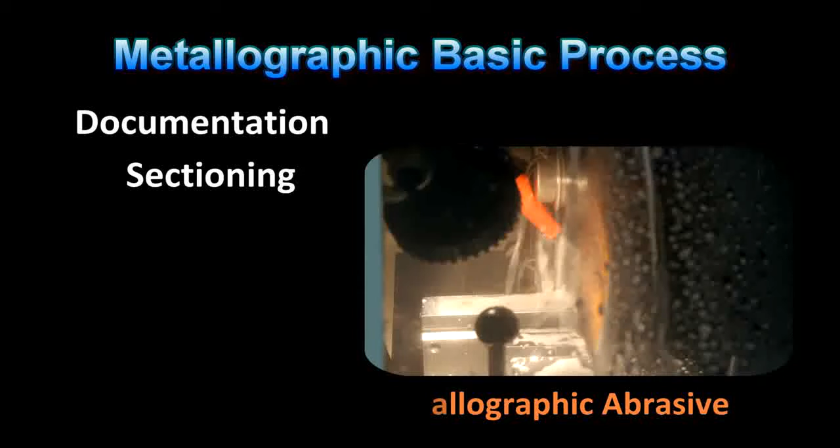Metallography can be broken down into 6 basic steps. The first step is to thoroughly document the sample. Since metallography is a destructive testing procedure, cataloging the initial condition and its history up front will save you a lot of anguish later. In many cases, the samples will need to be cut to either reduce their size or to approach the area of interest. Sectioning can be the most critical process, so proper cutting should minimize the amount of microstructural damage to the sample.

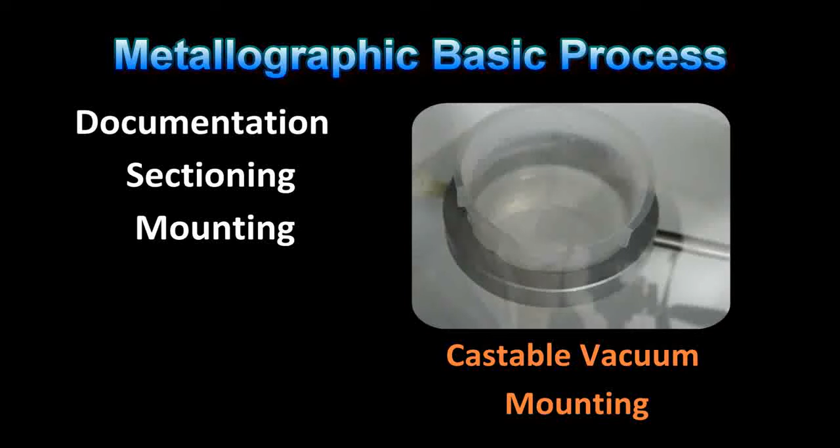After sectioning, it is recommended that the specimen be mounted in a plastic compound for ease of holding for manual grinding and polishing. Also, in most cases, mounted samples will be required for automated sample preparation machines.

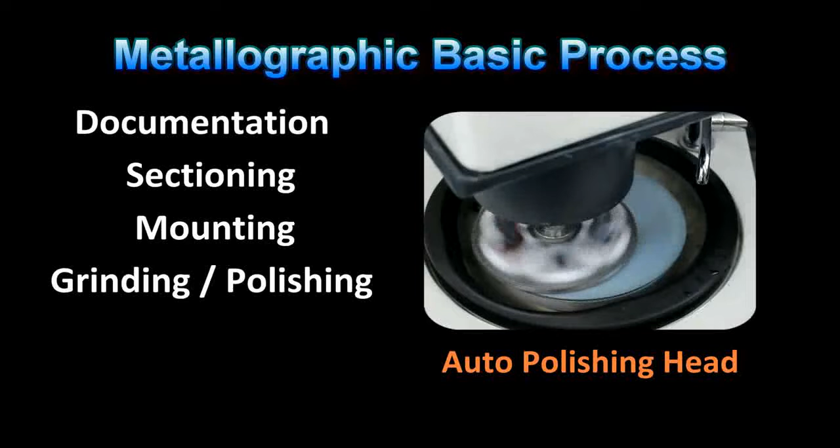The most challenging and variable processing step will be the grinding and polishing sequences. This is where there are a lot of differing recommendations and recipes in the industry. What we have done, based on our years of sample preparation testing, is to characterize and classify the specimen preparation techniques into 11 classes based on the material's hardness and ductility. These classes will provide the basic building blocks for properly preparing metallographic samples.

After the grinding and polishing operation, the specimen will have a highly polished and damage-free surface. There may not be a lot of features visible to the eye or with the aid of a metallographic microscope at this point. This is where the true art of metallography can be found. What is most commonly done is to etch the specimen in order to selectively bring out the microstructural features.

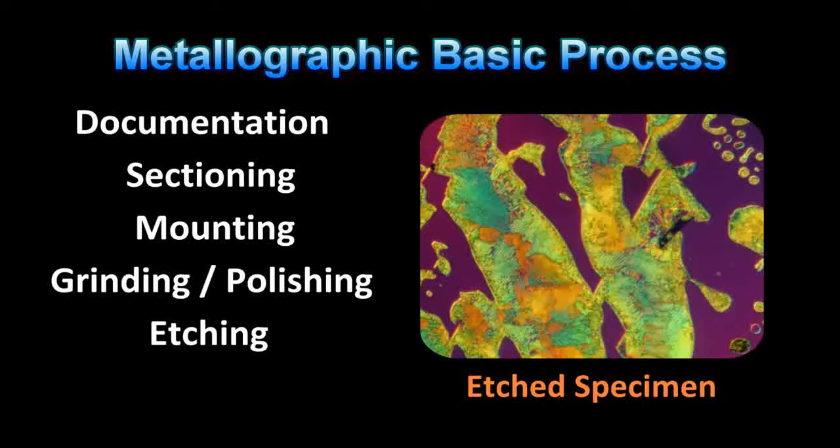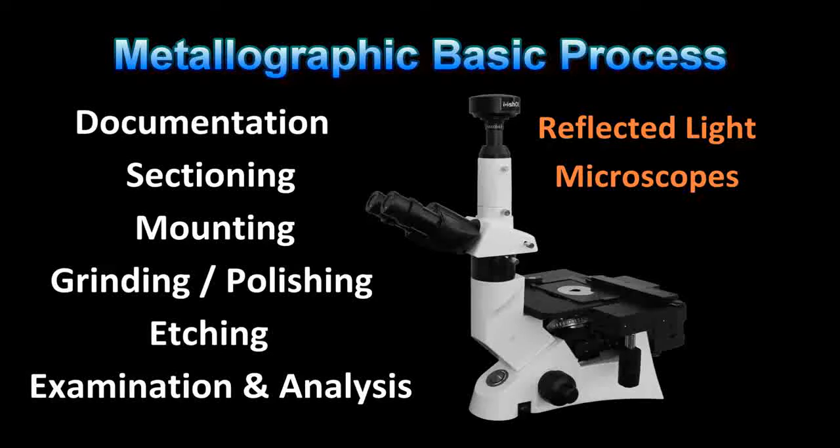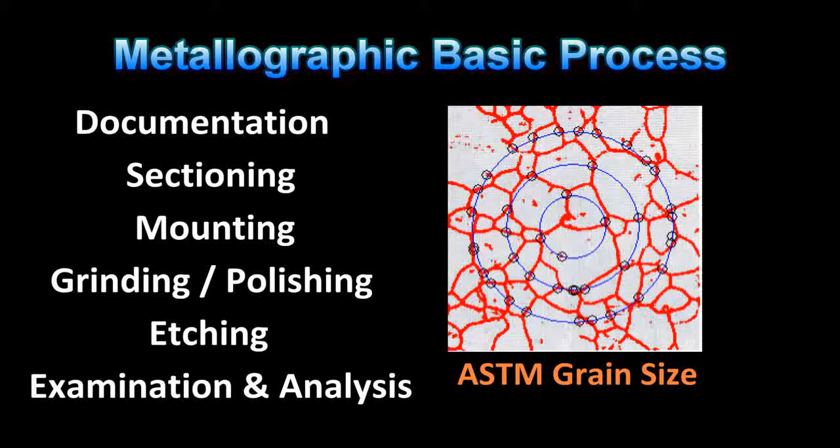Once the features have been enhanced, examination is mostly accomplished with metallurgical reflected light microscopes or scanning electron microscopes. However, there are a lot of ways to characterize the specimens depending upon the requirements. Depending upon the documentation requirements, quantification of the basic metallurgical ASTM standards can also be accomplished and documented with image analysis processing software. To truly understand what is required for metallographic specimen preparation, it is crucial to have a knowledge

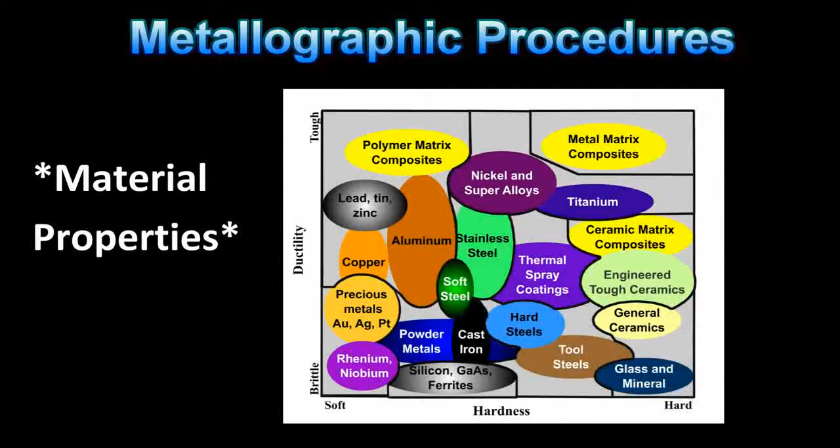of the basic properties of the material being tested. The following chart plots the most common types of materials based on their ductility and hardness. Ductility is based on a material's brittleness or toughness, and hardness is classified as either soft or hard. How a material's microstructure will respond to cutting, grinding, and polishing will be directly related to these mechanical properties.

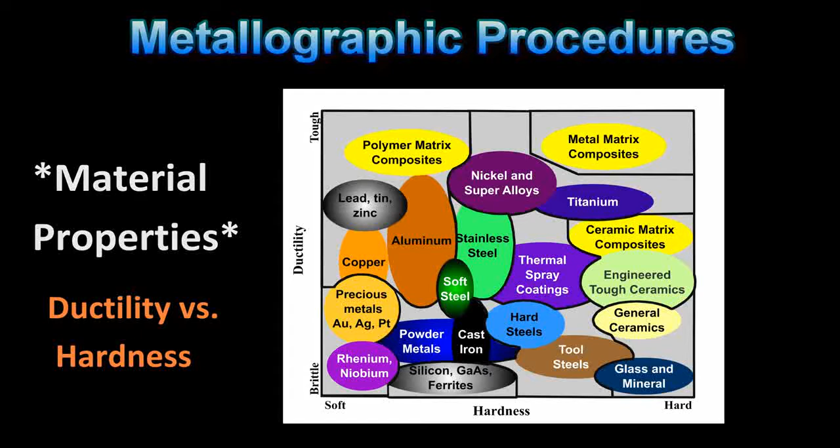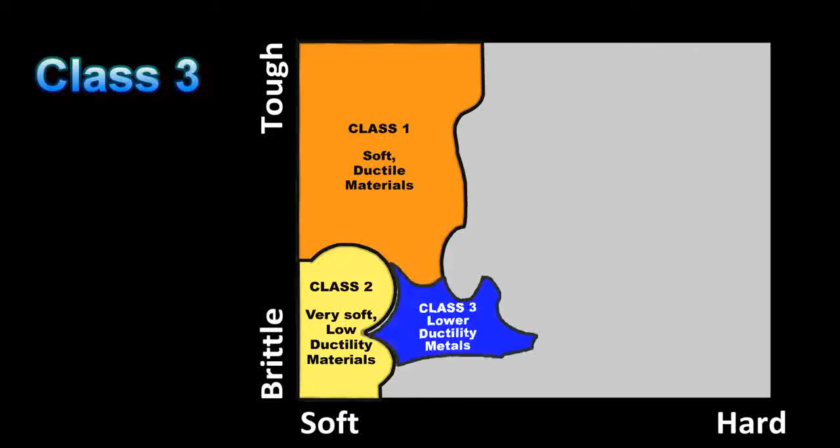Class 1 materials are softer and more ductile. Examples of these include aluminum, copper, lead, and zinc. Class 2 encompasses very soft and ductile materials where abrasive embedding can be a problem. Examples include rhenium, niobium, gold, and silver. Class 3 covers medium soft and ductile materials. Examples are powder metallurgy parts and cast irons.

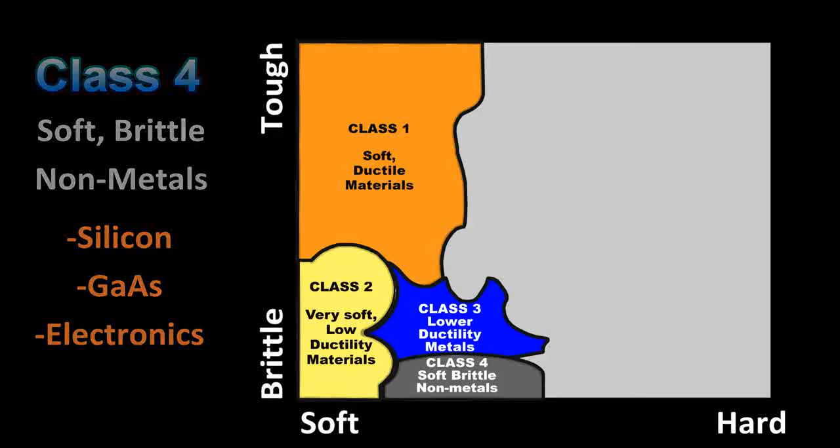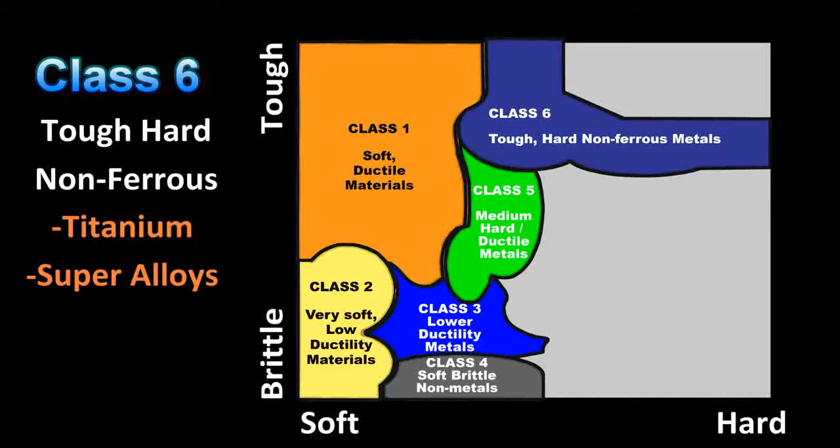Class 4 materials are characterized as soft and brittle nonmetals. Examples include silicon and gallium arsenide semiconductor materials and other electronic nonmetals. Class 5 are medium, hard, and ductile materials such as low-carbon steels and stainless steels. Class 6 covers harder and tougher non-ferrous materials such as titanium and other superalloys.

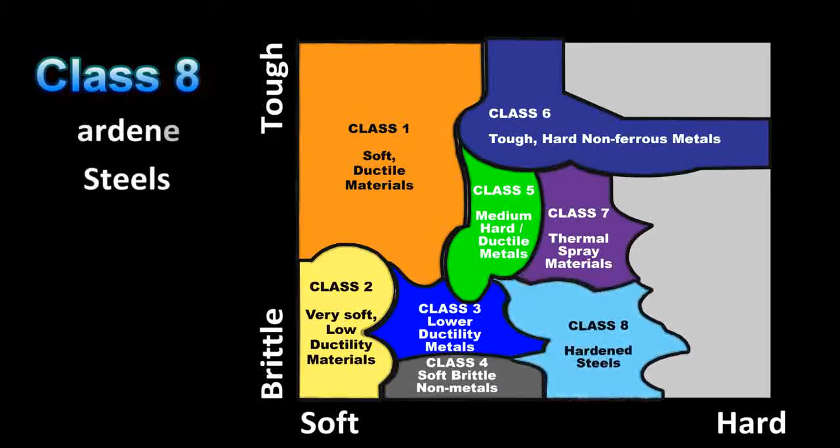Class 7 thermal spray coatings are hard coatings on softer substrates. They are essentially hard materials with moderate ductility. Often, these materials are used for wear and thermal resistance. Class 8 represents heat-treated and hardened ferrous alloys.

Class 9 materials are characterized by high hardness and high ductility. They are often engineered materials such as metal matrix composites. Preparation can be tricky due to wide variations in the individual component properties.

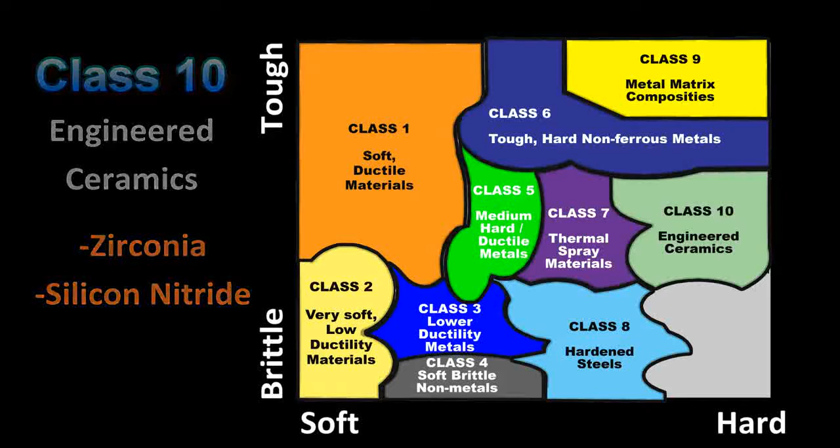Class 10 properties include the tougher, very hard engineered ceramics, such as zirconia and silicon nitride. Class 11 are very hard and brittle materials. Examples include glass and mineral specimens.

With a basic knowledge of the material's properties, let's now take an overview look of the specimen preparation steps.

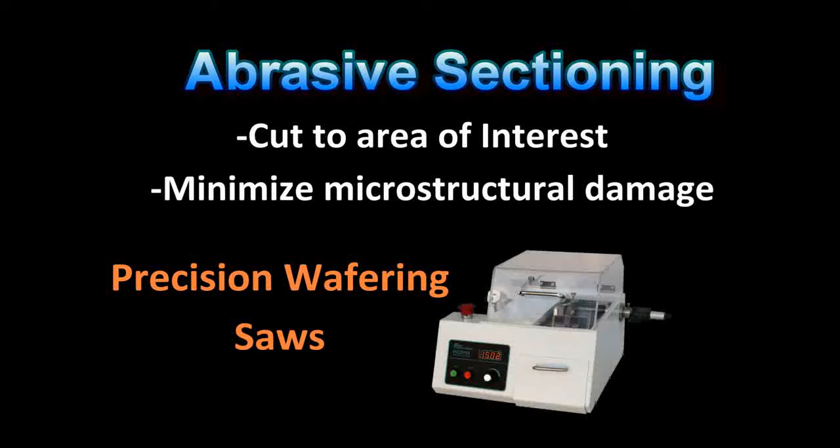The purpose of abrasive sectioning is to cut to the area of interest. The goal is to minimize the amount of microstructural damage. It is important to note that it will be time well spent on this step to minimize cutting damage, as there are cases where no amount of grinding and polishing will be able to eliminate excessive microstructural damage. The two main types of abrasive sectioning are with an abrasive blade cutter and precision wafering saws.

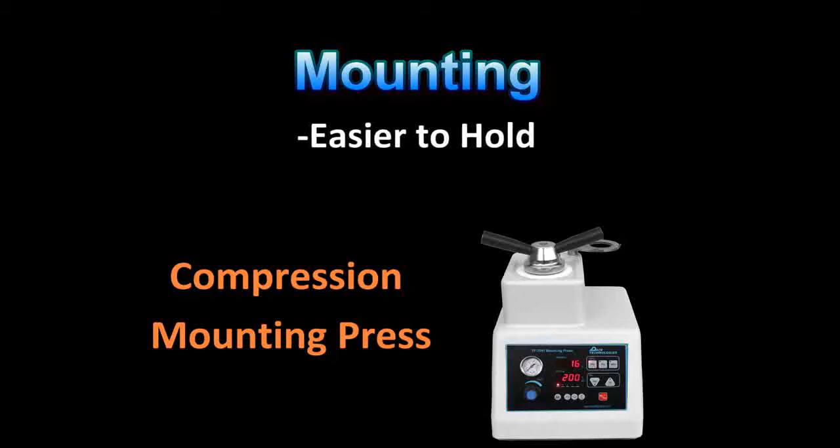Mounting may or may not be required. However, in most cases, mounting can make the specimen preparation process much easier. The main reasons to mount a specimen are for easier holding and to protect the critical microstructural features. Mounting is done with the aid of compression and temperature mounting presses, as well as castable resins, sometimes erroneously referred to as cold mounting resins.

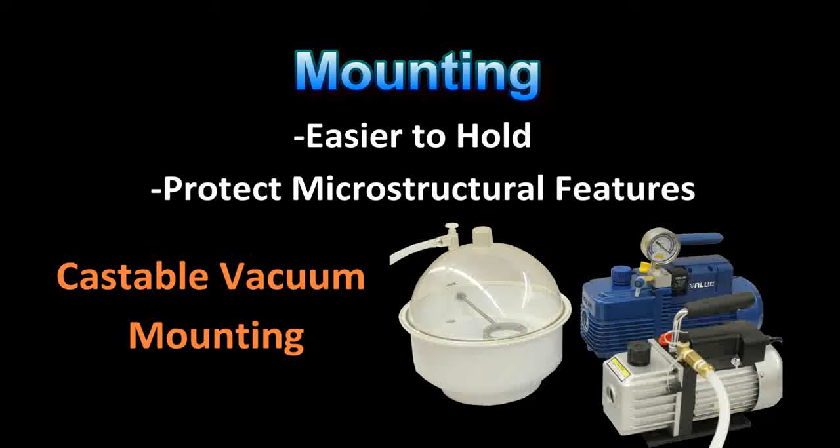In many cases, rough grinding with today's more advanced polishing machines is not required. However, if you cannot cut close to the area of interest, belt grinders can be used to efficiently grind to the area of interest. It is highly recommended that a belt grinder with a squaring fixture be used. Otherwise, a lot of secondary rough grinding may be required. Note, rough grinding may also be required if the samples were not cut properly to begin with.

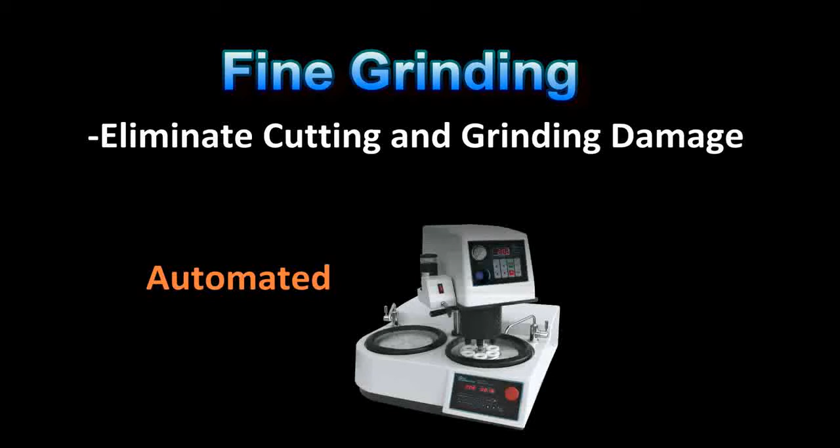Fine grinding is accomplished basically with a stepwise progression of finer and finer abrasives to eliminate the previous step's damage. This damage can be to both the surface and subsurface layers of the microstructure. This process is commonly done with manual or automated grinding machines.

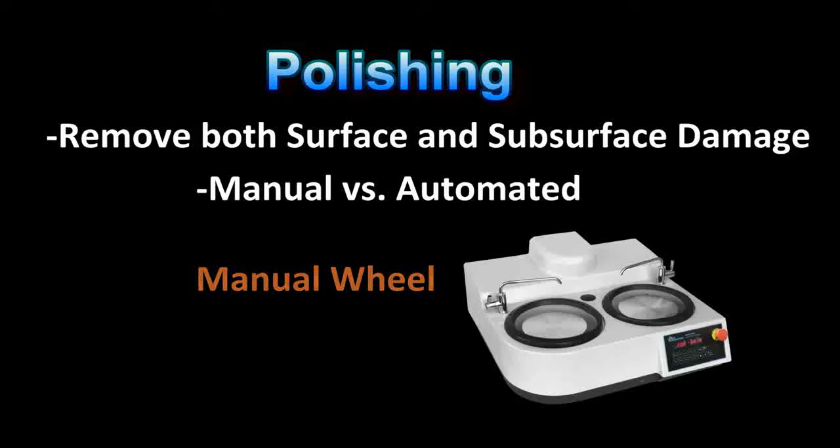Polishing is the final mechanical preparation step. The goal after this step is to have eliminated all the surface and subsurface damage. The process is easier with automated polishing. However, it is not uncommon for skilled users to manually polish the specimens. Additionally, by far the best way to final polish a specimen is with vibratory polishing. Vibratory polishing gently abrades the surface layers without introducing subsequent damage. Often, vibratory polishing also uses CMP or chemical mechanical polishing abrasives to enhance the polishing process.

Etching is where the real art comes into play for microstructural preparation. It is used to reveal the microstructure for highly polished, damage-free specimens. Etching is accomplished via chemical, electrochemical, electrolytic, thermal, magnetic, and other more specialized techniques.

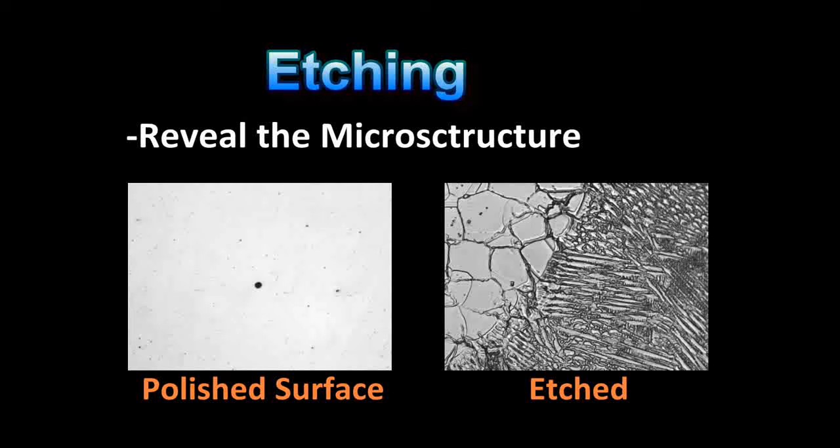Once the specimen is prepared, the next step is to evaluate the microstructure. Since the majority of metallographic specimens are reflective, a metallurgical microscope is required. For these types of microscopes, the light is reflected off the surface, and depending upon the optical setup, the microstructural features are revealed.

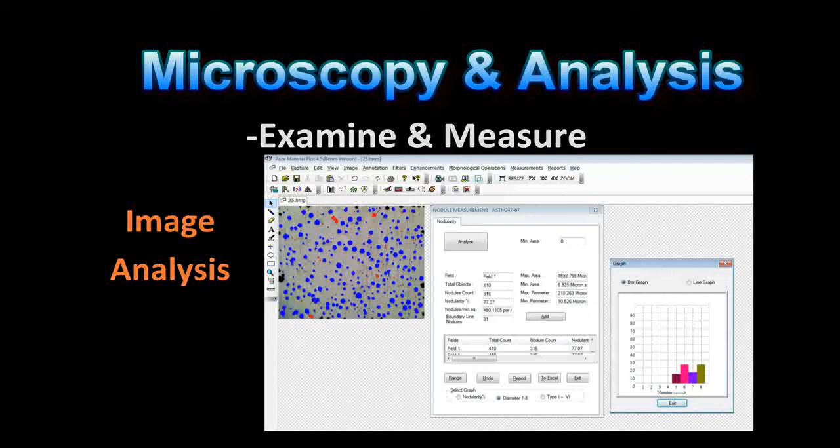Quantitative image analysis based on ASTM standards can also be obtained and is very easy with today's computers and software. The results for metallographic testing provide a means to monitor quality control and to determine why something failed for future product improvements. Metallography is certainly a very powerful tool.